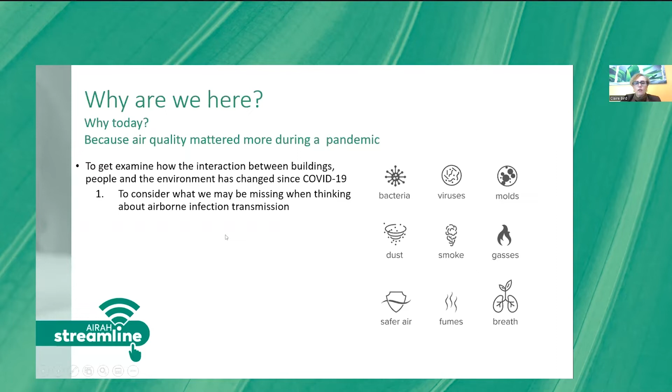So what I hope to get out of today is to examine how the interaction between buildings, people and the environment has changed since COVID. Also, we'll look at considering what may be missing when we're thinking about controlling infection transmission. And I want to consider the impact of air quality and transmission mitigation strategies on the broader environment, and its impact on our energy burden and global warming burden, by putting in place preventative measures for infection control and improving our indoor air quality.

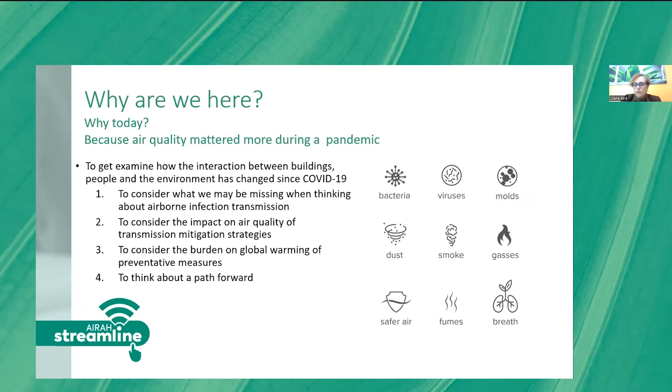But it's really important in any of these sorts of talks that you propose a way forward, and that's something I'll do at the end of the talk.

So certainly public perception has changed. When I think about it as a consultant, I used to get calls from people, and their number one concern would be odour. The second concern would be mould. The third would probably be something that smelt, often a VOC or sewage-related issue, and they'd be worried about having too many children in a classroom and how carbon dioxide might be affecting performance in their workplace or learning centre. The other thing people were concerned about was external pollution, particularly in developing countries where external air quality is very, very poor.

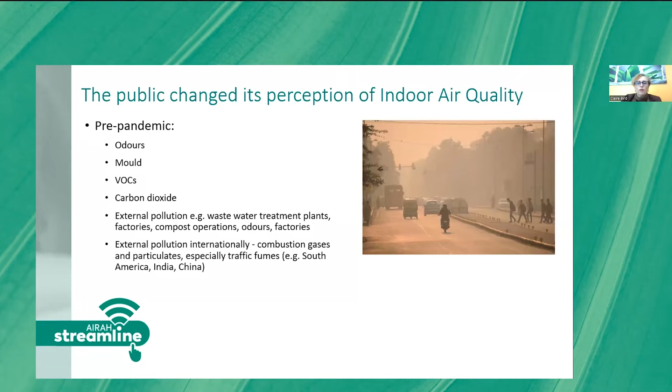We intrinsically bring outdoor air in our indoor environments, we can't survive without it. So even things like wastewater treatment plants and compost operations can lead to odour problems and other microbial concerns. So that's really where we were thinking.

But then came the pandemic, and we had a lot of exposure through both social media and the media generally, and our focus changed to really being pathogen-centric. We started to think about what part carbon dioxide might play in helping us control our air quality. People were still concerned about mould, probably more so than ever, and VOCs, and we've just seen a huge uptick in indoor air quality services demand across the industry.

Scientists are also looking differently at air quality, and we're looking at it these days through a lens of transmission. So pre-pandemic, the biggest concern for scientists were probably volatile and semi-volatile organic compounds in terms of health risks. Certainly carbon dioxide was still an issue in terms of performance and health, ingress of external pollutants, and dampness. Dampness in buildings is what makes people sick, and we'll talk about that a bit later when we touch on mould.

Because that's what I do these days — I run the mould analytical laboratory, and we look after contaminants from buildings primarily that are microbial in nature.

The other thing we were concerned about was emissions from our air conditioning system from mould, but also we were concerned about Legionella and controlling it and monitoring it, and Legionella in dead legs in plumbing systems and faucets. And yes, we were worried about greenhouse gas emissions and climate change, because this affects so many different things.

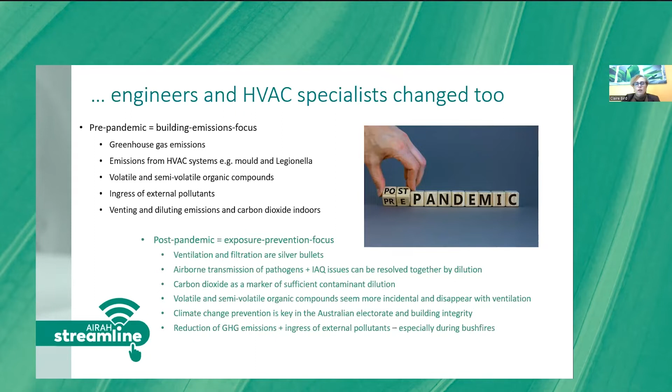I guess the other thing we saw with the election is the public interest in climate change and the importance of controlling it. The other big factor that hit us just prior to the pandemic, of course, was the awful bushfires that we had. So post-pandemic, we've still got a lot of these concerns, but we seem to have shifted to a concern about protecting ourselves rather than preventing emissions, and that will be a focus of today's talk.

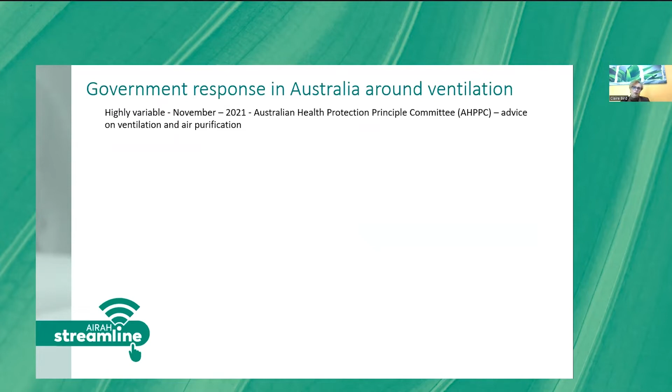So we saw hugely variable responses by the government to accepting airborne transmission and looking at how we improve our ventilation. In November 2021, the AHPPC did produce advice on ventilation and air purification, but that's only a few months ago, and we've been living with this for nearly three years.

If you look at the Safe Work website and look under their COVID section, they tell us it's reviewing it, but at the moment it's still telling us to keep away from people and wash our hands.

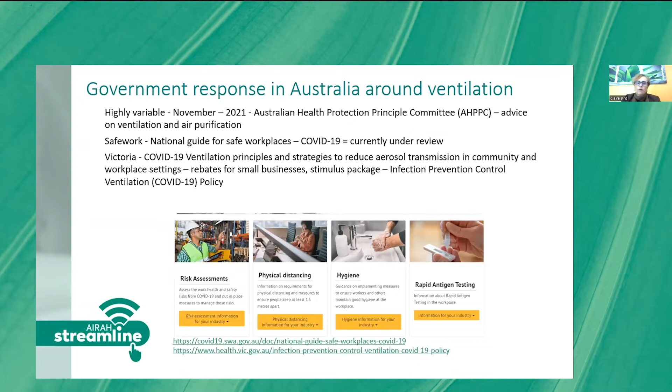Whereas if you look at the Victorian government, which has kind of roared ahead with this, they've got in place their ventilation principles and strategies to reduce airborne transmission. They've got rebates in place for small businesses wanting to increase ventilation, a stimulus package, and they've recently produced their ventilation policy as well.

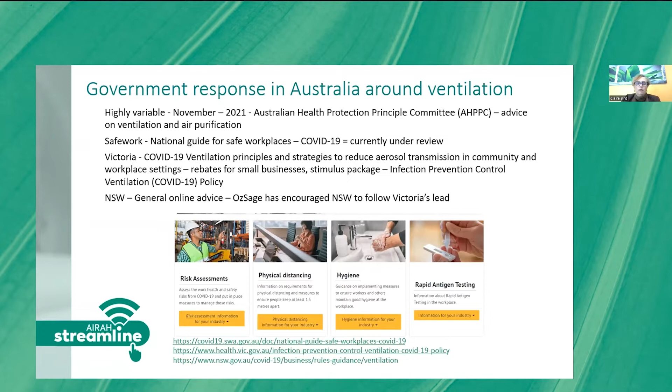Whereas New South Wales are now being encouraged by scientists in Australia to follow Victoria's lead, and they just haven't kept pace. So it's very variable across the country.

Now, foreseeing that this was going to be a problem, there are now groups of experts across the world who have got together and joined forces. In Australia, our leading driver in this area is a group called OzSAGE. This is something that our very own Lidia Morawska and Kate Cole, who's president of AIOH, have been very involved in driving. But there's a huge number of very, very qualified scientists and people involved at different levels with building safety who've got together in Australia to try to drive this change and acceptance of airborne transmission.

I'm part of a group in Canada, the equivalent group called the Canadian Aerosol Transmission Coalition, doing the same thing there. And I'm Executive Secretary of the Integrated Biosciences and Built Environment Consortium, which I'll tell you a bit about in a moment. We've put together a global group to look at how we can get on top of airborne transmission and manage it through these strategies that we're all familiar with at AIRAH.

The AMCA pulled together, Ben Hawkins pulled together a wonderful group of specialists from building performance assessment through to portfolio management and everybody in between to start to look at how we could get this airborne transmission taken seriously. And of course, AIRAH is leading the way in providing some great resources and webinars like today to really highlight that change. So I'm just going to tell you a little bit about IBEC because we are working with AIRAH on part of our programme.

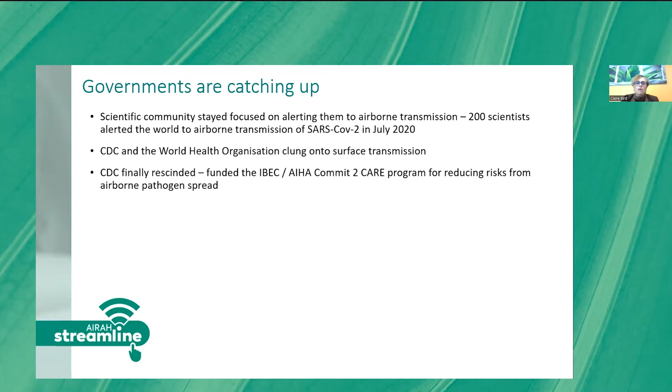So what is indoor air quality and what does it mean outside of disease? Well, any disease or contaminant becomes a pollutant when it's at a high enough concentration to make us sick. So it can be an individual compound, or it could be a physical, microbiological or chemical component, or it could even be a combination of those that leads to adverse health effects.

So just a very quick scout through a list here of some of the gaseous contaminants that we're familiar with in the indoor environment. The semi-volatile compounds, a lot of them come from things like flame retardants - they're very much a work in progress and known to have significant health effects. Particulate pollutants are very wide-ranging in the indoor environment, from asbestos and respirable silica through to incoming diesel particulate from traffic fumes, fungal and bacterial spores and fragments, and of course viruses are particles.

Viruses are quite unique in that they're what I've coined a multi-phase particle. It's a solid particle of virus entrained in a liquid particle of mucus. When you've got these multi-phase particulates, they can behave quite differently to things like an asbestos particle, which is effectively a physical particle. So we'll have a look at how that may impact the control measures we might make in terms of filtration and ventilation in the environment for these types of particles.

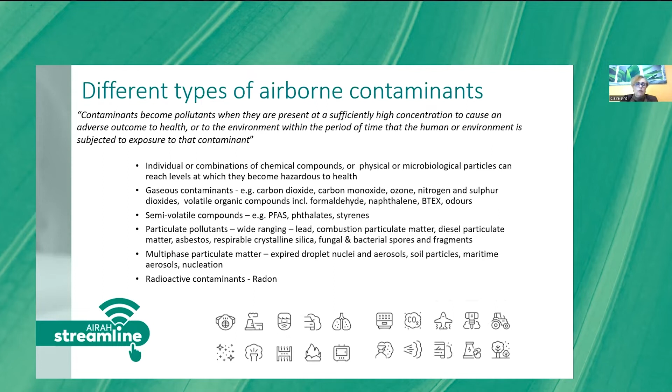The other indoor contaminant which we don't hear as much of in Australia is radon. What we have in the environment at any time is a balance of what's come into the environment from the sources. Here's just a list of some of them, things like gases from paint and adhesives, particles from microbial growth or exhalation of these multi-phase particles, and particles and gases coming from outdoor air through fresh air intakes.

Once those particles get in the environment, they're constantly settling onto surfaces and constantly being resuspended. At any point in time, what we're exposed to in the air is really a balance between what's being released and what's being taken away. Some gases absorb onto surfaces, or react with other gases. Some get taken out of the building with return air and extraction, and other particles are just lost to outdoors through general air exchange through the building envelope.

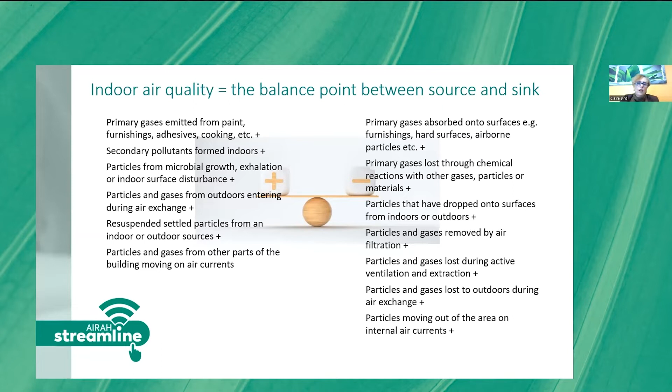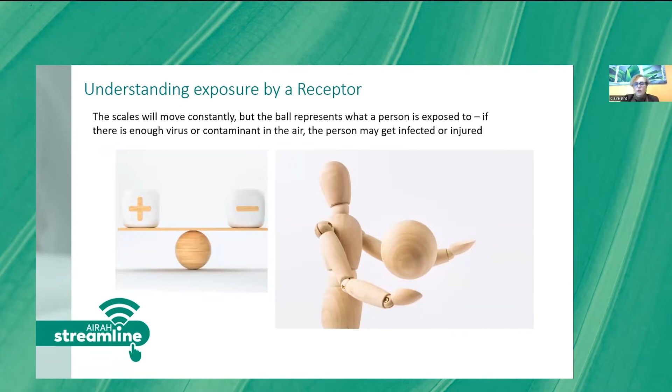At any point in time, what we're exposed to in any space is a balance between what's come in and what's gone out, and that balance point is constantly changing. What we're exposed to is whatever is in there at that point in time. So if we're unlucky and there's enough virus released into the environment that hasn't been diluted or removed, we can catch an infection, or if it's a chemical contaminant, we can get sick.

So how do we prevent transmission? What are the things that we consider? IBEC has actually devised, with AIHA, the 4 Ds: density, distance, duration, and dilution.

There's some things that the person has control over. You can decide how far away you are from someone and how much time you spend in a space. Obviously, the closer you are to somebody and the longer you spend there, the more likely you are to get an infection. You also can play a part in diluting the virus, because if you've got the virus and you wear a mask, you're not going to make the concentration in the air as high. If you're in a room with virus in the air and you wear a P2 respirator, you've got less likelihood of being infected.

It's worth pointing out that there's some reconsideration being made of masks at the moment, because the BA4 and BA5 Omicron variants are highly transmissible. We're now saying that P2 is really potentially the only suitable mask for preventing infection spread, which is a shift from surgical masks with the earlier variants.

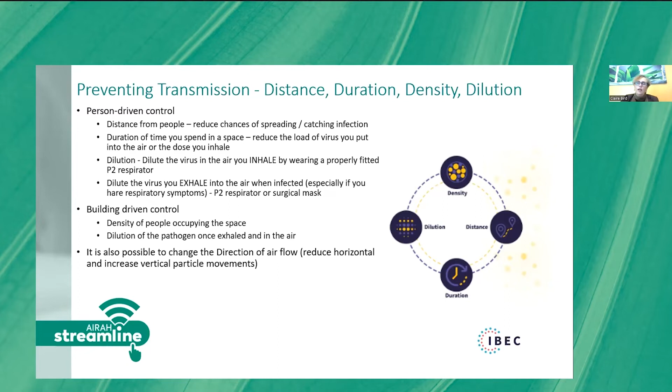In terms of what we can do with our buildings to change infection spread, we can reduce the density of people in the space, and we could dilute the pathogens through ventilation or filtration. Another thing we sometimes need to think about is direction of airflow. For instance, in transport vessels, having lateral airflow allows you to very easily move a viral pathogen from one person to another, where vertical air movements do that a lot less.

I'm just going to ask a question: let's look at this model again, but actually look at it from the perspective of somebody being infected. If we've got a high density of people in a space, like in a classroom, a place of worship, or a transport vessel, we've now got a higher chance that somebody is going to be infected in that space and infect other people. From the distance point of view, the distance that infected person is from everybody else will determine how likely they are to infect someone. From a duration point of view, the longer they're in that space infected, the higher the load's going to be in that space.

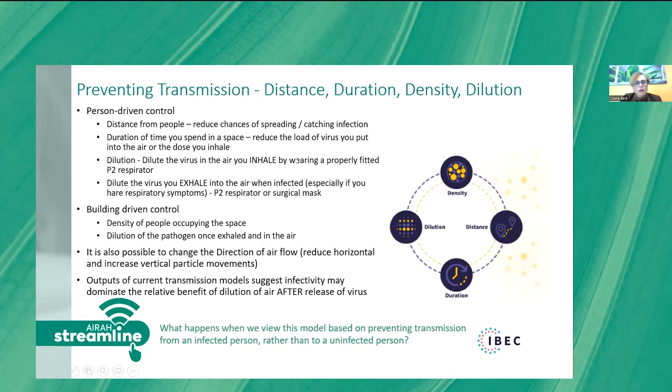And there may not be a lot we can do about those things because we don't know who's infected. But dilution is interesting because the only way we can dilute that source of infection is through stopping it within the breathing zone of that person before it gets into the general environment. So there is a shift here that we're not necessarily thinking about.

As somebody who spent a lot of time working in the external air quality environment, I'm familiar with some of these different ways we look at emissions. We have area sources where there's emissions coming from all different places simultaneously, like bushfires, agricultural, fuel stations, because there's lots of fuel stations around the place. They're all areas.

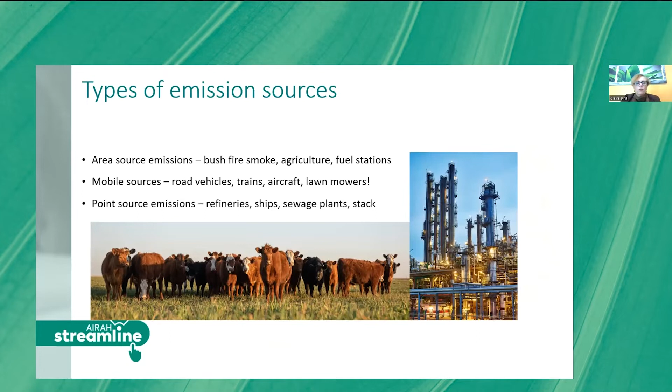Mobile source emissions include trains, aircraft, and even lawnmowers. But we also have point source emissions where we know there's one particular place that's releasing something - it could be a sewage plant or a refinery. An area emission source becomes a point source where it can be traced back to a single point of release or generation of the pollutant.

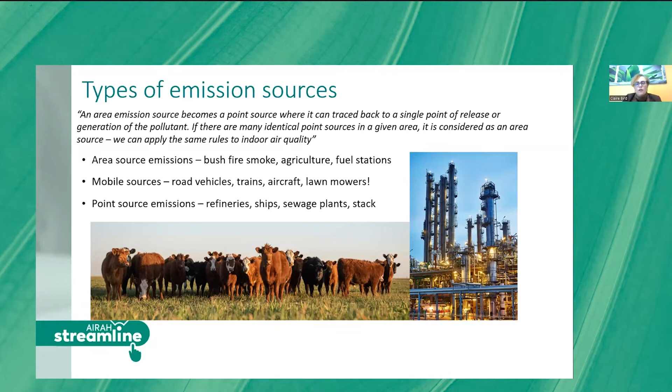If there are many identical point sources in a given area, it then becomes considered an area source. This idea of having a point source where we can identify that contaminant back to one place, versus an area source, actually plays into how useful ventilation is in what we're doing.

We've got some examples of point source emissions. They're obviously an infected person coughing; other biological aerosols in buildings come from toilets, food waste. Even if you've got a lot of plants and soil around the place, they can create a localised source of particles. In terms of construction activities, things like release of asbestos, respirable silica, and lead-based paint normally happen around where the work's actually taking place. So they're also a point source.

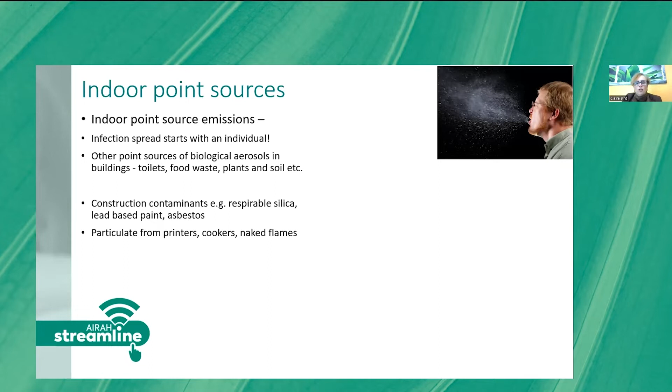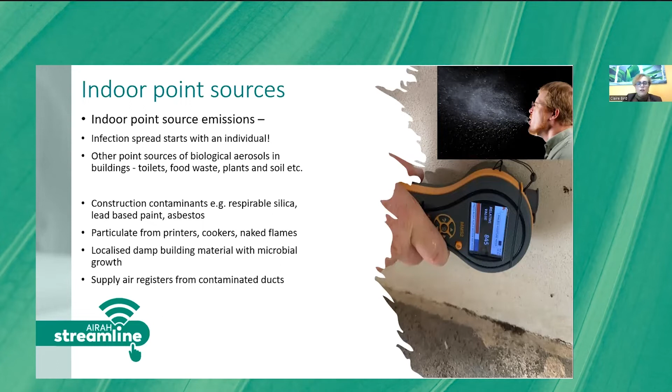Then you've got printers, cookers in kitchens, and naked flames in fires or even gas fires - all of those are point sources of pollution. The other thing is if you've got a very localised damp spot on a building material, that can create growth of mould in a very localised location. Another example is if you've got a contaminated duct just in front of a supply register - that's a local point source of emissions.

Area sources are quite different - things like carpets, timber, and resilient floor coverings, furnishings are spread throughout the building and constantly potentially releasing contaminants, so that's an area source. Contaminants coming in from outdoors through a big open window quickly mix in that environment and become an area source, and that's the same for anything coming in our fresh air intakes.

If you've got a lot of people in a room, they're all exhaling carbon dioxide and water vapour - that's an area source. So we're looking at the moment in monitoring an area source to control a point source. We're monitoring carbon dioxide, which comes from everybody in the room, to control concentrations of something that's coming from perhaps one person in that room.

That's interesting. If you've got damp building materials from condensation, you might have much wider growth of mould over larger areas, or if it's further back in your air conditioning system and being passed through your supply, that obviously creates an area source. If you've got a lot of people infected in a space like a cinema or classroom, then you've got an area source of infection as well.

The other thing we often forget when thinking about things like ventilation is how air movement and dead spots might affect the concentrations in that room. You might have an area source of contaminants, but they might end up accumulating in one place. Or you might have a very localised source that very quickly gets dispersed if you've got very good mixing.

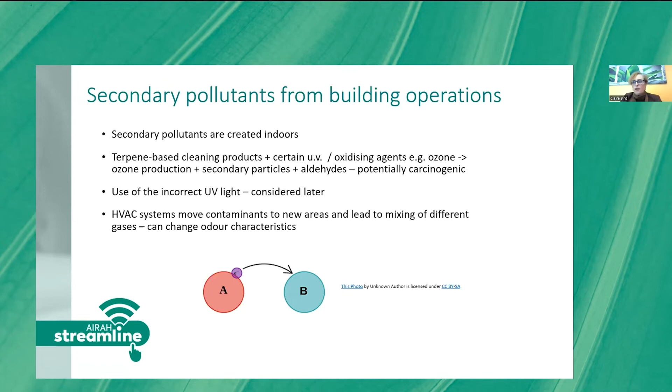So this is where it gets interesting. When we want to manage area emissions indoors, like carbon dioxide or VOCs, ventilation is perfect because we're going to reduce the concentration of those contaminants.

Filtration is great if you want to remove large quantities of particulate matter. So you're going to be dealing with large quantities of air through your filtration, and that may be in your HVAC system, or it may be on a mobile filtration or air purification device. And there's a lot of standalone air purification technologies out there, which we'll have a look at.

But when we deal with point source emissions, normally—I was speaking to Patrick Chambers about this the other day, and he and I hope to present a follow-up session on a topic you guys would find most useful on the back of this discussion later in the year, which Marie can tell you a bit about. When we think about point sources, we don't normally deal with them using ventilation.

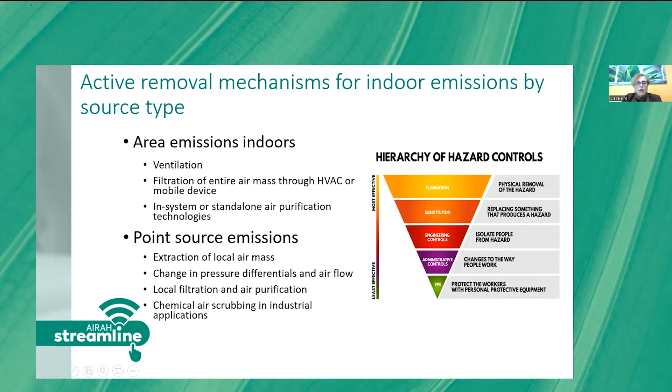We have local filtration and air purification where we have these sources. And again, with industrial applications, you're often even having chemical air scrubbing specifically designed for those local generations. And yet we haven't thought at this point about infection as being a point source of contamination.

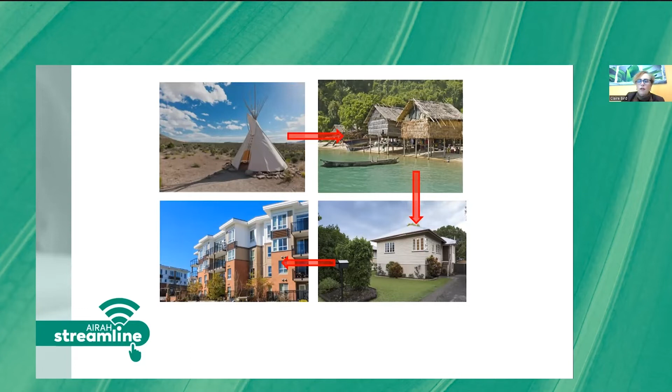And of course, as we've developed our buildings, we've made them increasingly airtight. So the type of ventilation we're looking at may be increasingly mechanical, but we still have an awful lot of buildings in Australia—I think 80% of schools are still naturally ventilated. So we've still got to look at supplemental technologies to actually keep air quality satisfactory in those spaces.

So natural ventilation is difficult to control on its own. It needs assessing—this dilution may not have been enough to reduce transmissibility or bring those airborne contaminants down to a safe level.

The occupant density and the occupant activity in that space may determine how adequate that ventilation is. If you've got people singing or working out in a gymnasium, you've got a much higher rate of expiration of viruses and any respiratory-borne contaminants.

And as I said earlier, one thing we're finding is that when we model air exchange rates, it's not always adequate to control infection spread in densely occupied spaces. So that's where we may need supplemental air purification technologies to mitigate infection risks.

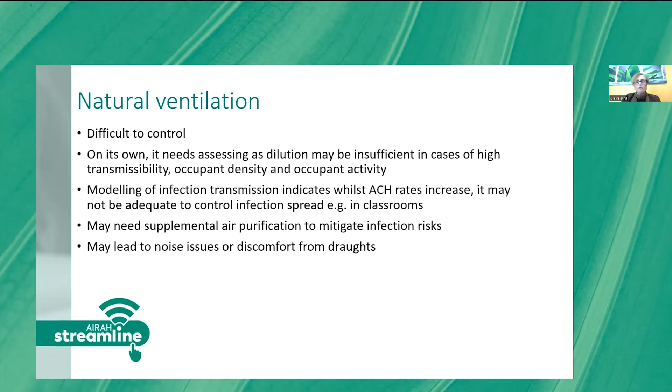The other thing with opening windows is it can lead to noise complaints. It can also mean there's a draft coming in and people become uncomfortable. So that then starts to affect thermal performance of the building.

We need to think as well, when we're increasing fresh air intake, about what we're bringing in from outdoors. We don't want our fresh air intake chugging away if it's going to bring in more contaminants from outdoors than we've got in the environment.

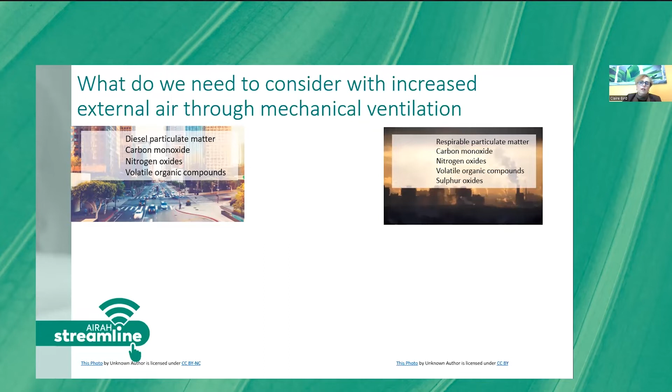So if we're very close to a road and in an urban area, there's part of the contaminants to be concerned about. If we're near an industrial site, then obviously there are other contaminants we need to think about filtering out of the air coming into that building.

Obviously, bushfire is a key one. If we're going to be changing our systems to move towards intake of more external air, how are we going to manage that when we know we've got a very serious health risk coming from outside? We still need flexibility for our systems to handle these sorts of changes, especially in a time of climate change.

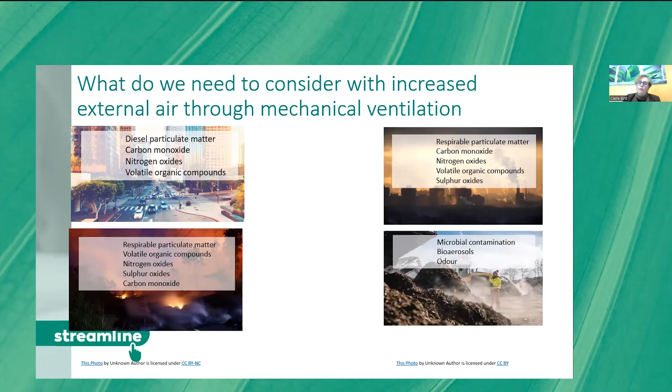And obviously, there are microbial contaminants and odours we want to control from things like wastewater treatment plants and compost works. Odour itself is actually quite an interesting beast. Even though the gases that create an unpleasant smell may not be present at a high enough concentration to make us sick, they can actually make us quite sick due to anxiety.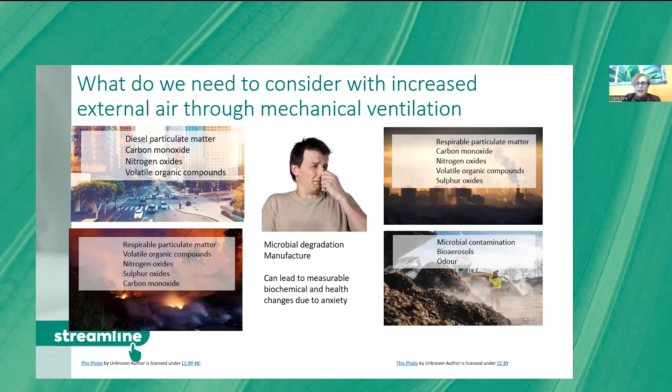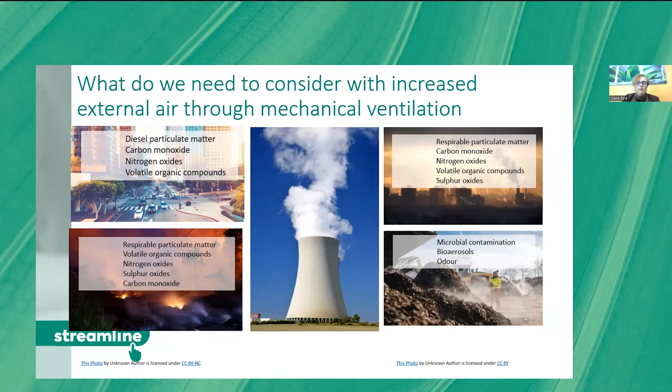Anxiety actually elicits very significant biochemical changes in our bodies that can lead to mental health illness. And it's not in our heads—it is actually a physiological response. The other thing we need to think about is how much humidity and moisture is in that incoming air, because that's going to really impact how efficiently our systems will be able to work, and that's what we'll look at.

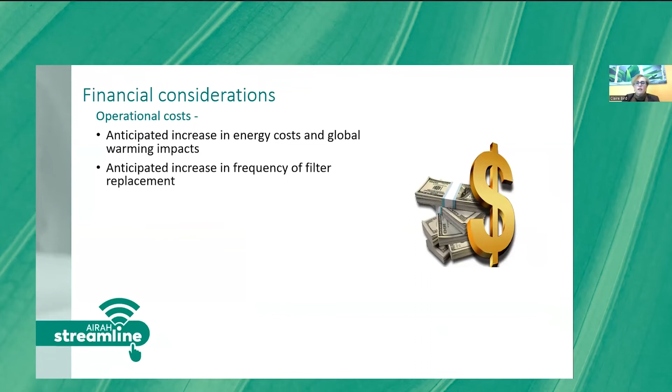Some of the financial considerations in changing the way we handle our air include operational costs. We're expecting an increase in energy use and therefore global warming impact, and there's also an anticipated increase in how often we need to replace filters if we're bringing more external air in.

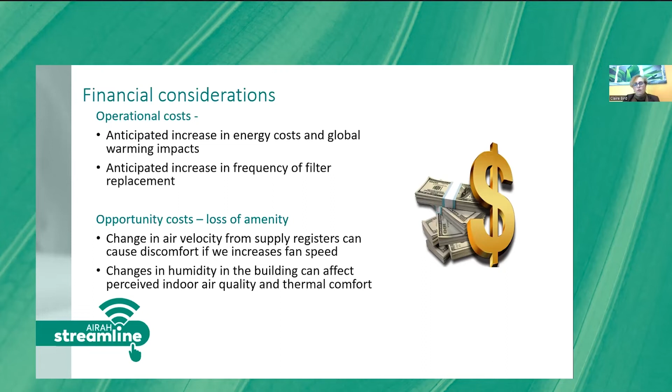There's also an opportunity cost here because amenity suffers if we're not handling our air and managing it so that it's still thermally comfortable. If we're starting to change the velocity of the air coming from the supply air grills, that can also change the perceived value of those asset portfolios.

The other big factor is that humans are deciding to do things differently, and therein lies a problem when we're promoting ventilation without explaining to people what that means and what the risks are, because it can lead to unintentional changes in airflow patterns in buildings if we change air ventilation but haven't actually understood how the air is moving through that building.

Certainly in Amoy Gardens, when we had the very first outbreak of SARS before SARS-CoV-2, we know that emissions from buildings that were venting, particularly from toilets out of apartments, were being picked up on air currents and carried a kilometre away, where they were making people sick in adjacent buildings.

One project I was involved with in Queensland was actually an odour project. We were tracking an odour issue with tobacco smoke. What we found was that if you've got a hallway that's positively pressurised and an apartment with a patio door closed, that apartment is always under negative pressure in relation to the hallway, so air doesn't move from the apartment out into the corridor.

But as soon as somebody opens that door, air is now moving from that apartment more freely into the corridor. And because the corridor is under positive pressure, that's then pushing the odour into the apartment next door. This is potentially why we saw the big problems with spread through multi-storey buildings when we had a lot of people under lockdown.

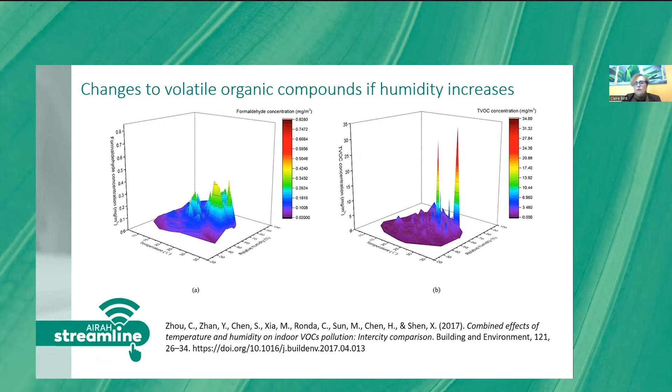It seems that above 50% humidity, you're really starting to see increases in release of formaldehyde in buildings, and again you're seeing increases in levels of volatile organic compounds. So if we change the humidity in our buildings, even within a range that we're normally comfortable with, we could be changing the amount of these contaminants in the air at any point in time.

The number AW is what's called the water activity of the mould. So a mould with a water activity level of 0.8 will grow when the surface reaches 80% humidity. As that humidity goes up, those surfaces become increasingly likely to be more damp or have a tendency towards higher humidity on them.

The more humid that environment becomes, the more likely you are to shift that microbial profile to one that's actually more harmful. And what we have to remember is that the ambient humidity might be, say, 75%, but if the surface is cooler, the humidity on that surface will be higher, and that will encourage mould growth.

When mould changes in the building, it's not the only thing that changes. One of the key misconceptions in indoor air quality is that mould is the only thing that makes people sick in damp buildings—that certainly isn't known to be true.

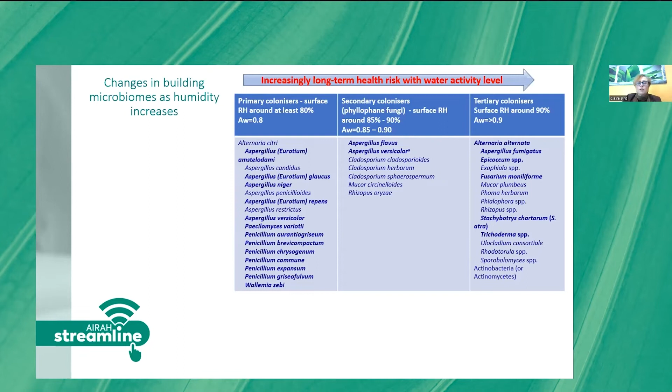In fact, bacteria play a key role. And once the building gets damp, you get increases in dust mites, cockroaches, and even rodents that lead to quite substantial shifts in the health status of that building.

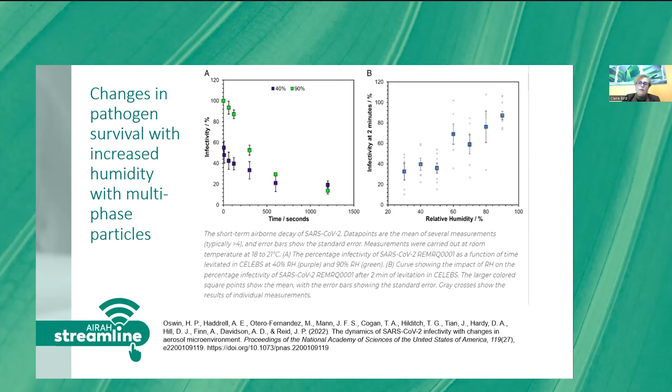In terms of semi-volatile organic compounds, they're phase shifters. They're quite interesting. They're unique in that they move between the solid and gas phase quite frequently. And that change seems to be driven by temperature rather than by humidity, for what we could tell at this stage. So there's still a lot of research going on in this area. But again, we need to keep an eye on any changes we make in that internal environment to make sure our ventilation is adequate to remove any increased risk.

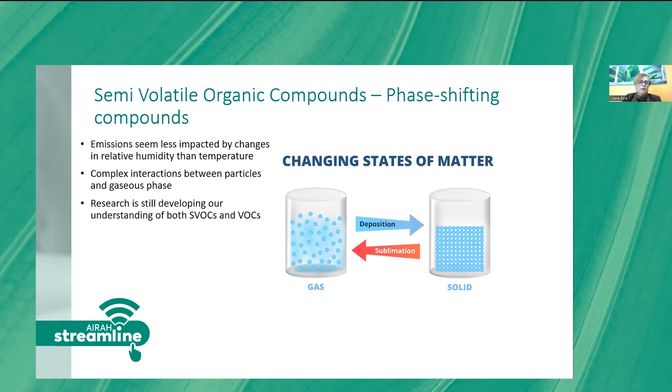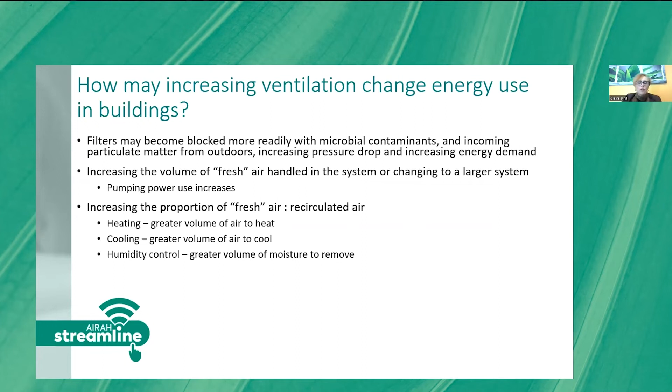Okay, so how does increasing ventilation impact energy use in buildings? Well, filters can become more blocked because you're bringing in more outdoor contaminants and particulates, and you're recycling more air through the system. If you increase the volume of fresh air being handled, then you're going to be increasing your pump use. And if you're increasing the proportion of fresh air compared to recirculated air, you're now having to heat or cool more air or take moisture out of more air. And that's actually going to increase your energy use.

And the interplay between moisture and energy is important, because when we cool air, we remove the moisture, usually by refrigeration. That requires energy. And when external temperatures are warmer than our inside, we have to cool air. When humidity is high, we have to cool air. When larger volumes of air are handled, we're cooling more air. So these are all places where we start to create an energy and a global warming burden on our activities.

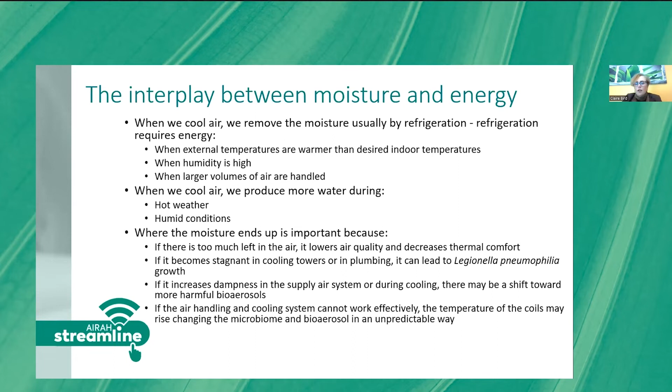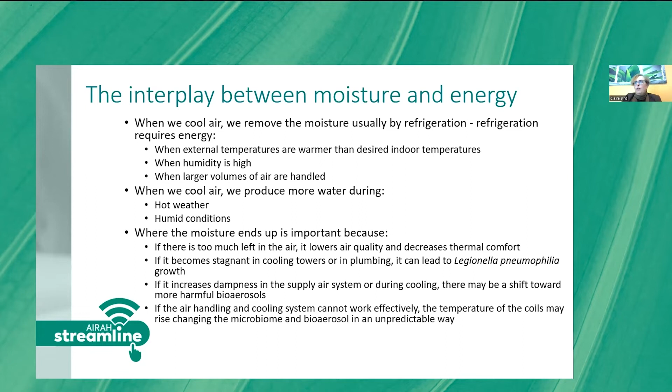And where moisture ends up in the building is important. We've seen the impact that humidity changes can make to air quality and thermal comfort. But also, if we've got a lot more liquid water in the building, say in cooling towers, then that may increase our tendency to release things like Legionella. So it's important that we think about how our systems are working. And if our systems aren't working effectively and we're changing the temperature, for instance, on our cooling coils, that may change the microbiome, that is the types of microorganisms that grow on them, and they may then lead to a different release of airborne microorganisms into the environment.

So when we increase energy, we know that we're having a significant impact on global warming burden because we still use fossil fuels in a majority of cases for our heating and cooling. Fossil fuels remain a key contributor to greenhouse gases. And because we've already got to the level where greenhouse gases are causing harm, any additional greenhouse gas leads to further change. And therefore, all greenhouse gases are pollutants because they're changing the environment.

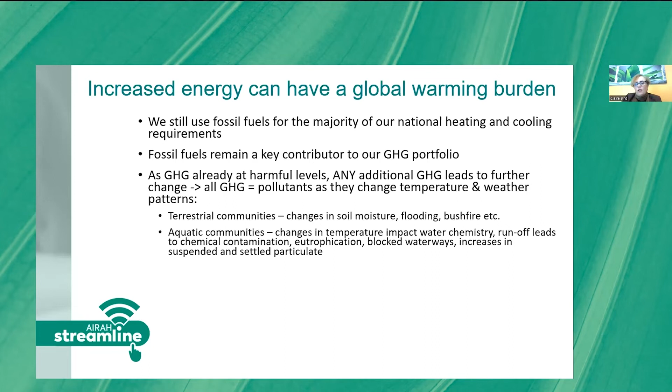They're changing our terrestrial communities, they're leading to flooding, bushfires, changes in soil moisture, which are affecting our agriculture industry. We know that we're seeing changes in aquatic communities, and we're seeing changes in things like migratory patterns in birds and bats and insects. And we've seen what's happened with COVID, but insects carry a significant number of diseases. So the changes in their niches is impacting health as well. We're seeing increased disease spread through flooding in particular, and general environmental changes. And also when we have catastrophic events, that does lead to significant mental health impairments in people that have post-trauma. We see economic impacts, of course, to our farming, travel and energy markets. And obviously we're seeing building and infrastructure damage, which we're very familiar with.

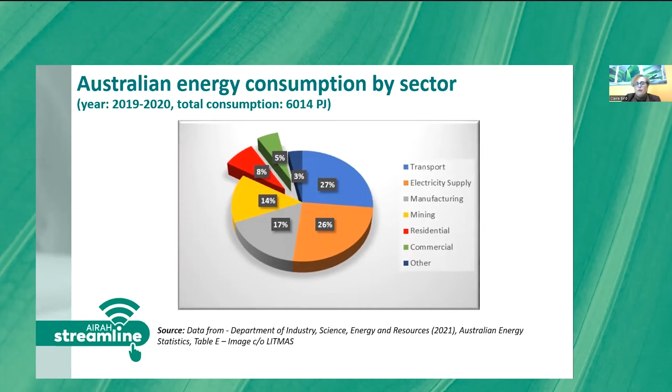So we've got to be very mindful that if we're going to make a decision to increase our energy burden, it's actually going to help us in the long run. Because Australia currently uses about 13% of its energy for residential and commercial buildings, and then 26% is actually getting that electricity to people. So there's actually a big burden in electricity when we use it.

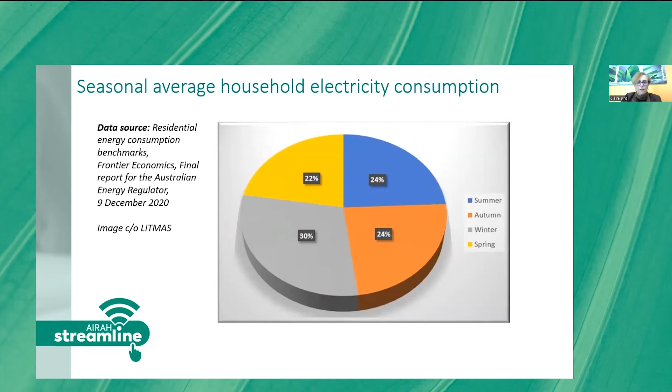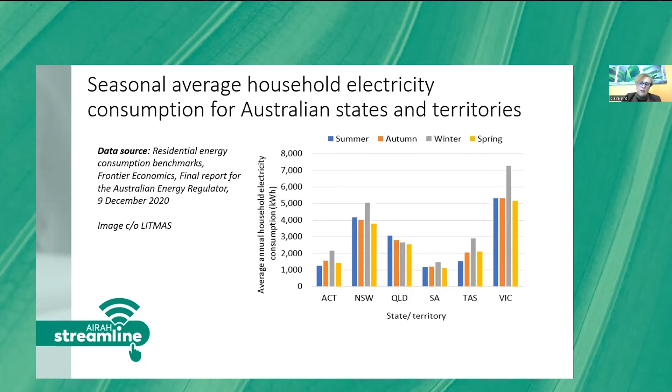So other factors we'd like to look at to finish off on ventilation: what else does ventilation do? We're ventilating the building for pathogens, and we're also diluting other airborne contaminants, diluting indoor odours, and diluting carbon dioxide, which makes the environment a lot more comfortable to live in.

Carbon dioxide emissions do not equate linearly to transmission of virus, partly because we're looking at carbon dioxide coming from an area source versus a point source, but also partly because viruses are particulate.

We said that we're looking at supplementing with high efficiency particulate air filtration, HEPA, which can be integrated into HVAC systems or in standalone units. If we're introducing these, we need to make sure we're not preventing the system from working effectively. We can also supplement with portable HEPA filters.

There's also an opportunity for filtration on people, for instance at their desks or within their breathing zone. And that, I guess, is what we know masks do—they're air filters in your breathing zone.

So what else does HEPA filtration offer us other than infection transmission control? It allows us to extract inhalable and respirable aerosols from outdoors, prevents things coming in from traffic emissions, and allows us to take biological particles out of the air indoors.

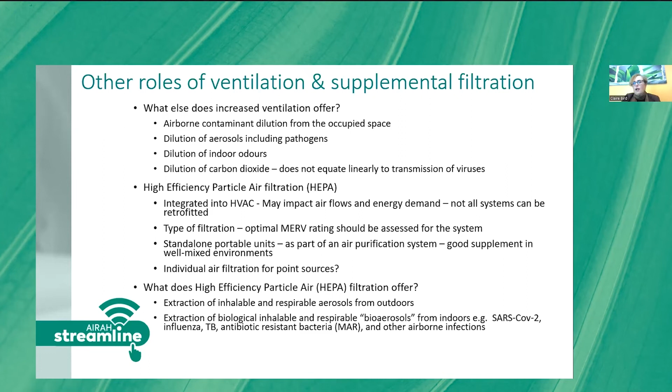One of the big upcoming threats we're going to hear more about in the indoor air quality space is multi-antibiotic resistant bacteria, MAR. Most of the effort in the UK at the moment, in the EPA, is being put into biosurveillance of antibiotic resistance genes in the atmosphere and environment. This is something we're going to be facing—systems that allow us to reduce the risk of antibiotic resistance spread.

There's a lot of talk about ultraviolet, so just a couple of slides on this. The graph shows the wavelength of the different ultraviolet light bands: UVA, UVB and UVC. We know UVC has been very successful in deactivation of pathogens in aerosols.

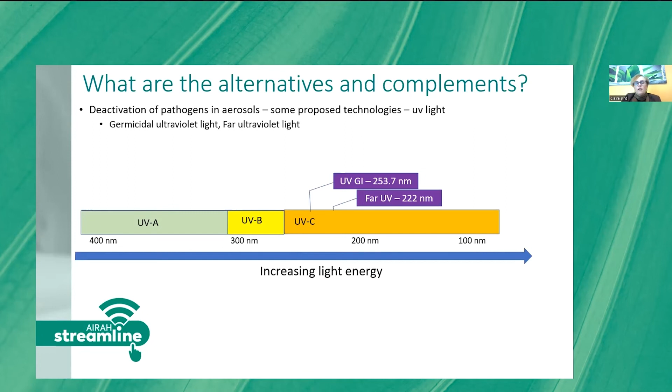Traditionally people are used to thinking about UVGI, germicidal disinfection, which sits at around 254 nanometers. More recently, research has come out on the use of far ultraviolet light, which is slightly higher energy, with a wavelength of 222 nanometers.

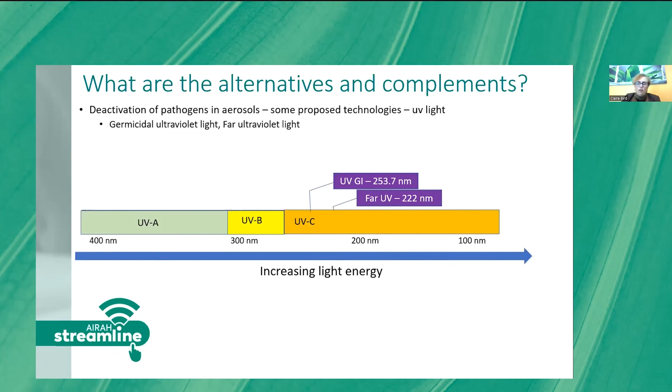The difference is that far UV has been shown to be less damaging to skin and eyes, so you can put it in an occupied space. The downside seems to be that there is some leakage into wavelengths with far UV that may cause some production of ozone in a space.

So a lot of research at the moment is going into making sure that if you use far UV, you're not releasing the very high energy wavelengths that lead to secondary pollutant formation.

Recent studies on far UV show you can kill 99.9% of a model coronavirus in 25 minutes, and in-room UV lamps have been shown to inactivate 98% of viruses in 5 minutes. But the key point is that the organism has to be in contact with that light for the necessary residence time to destroy it, so we've got to think about how quickly air circulates past those lamps.

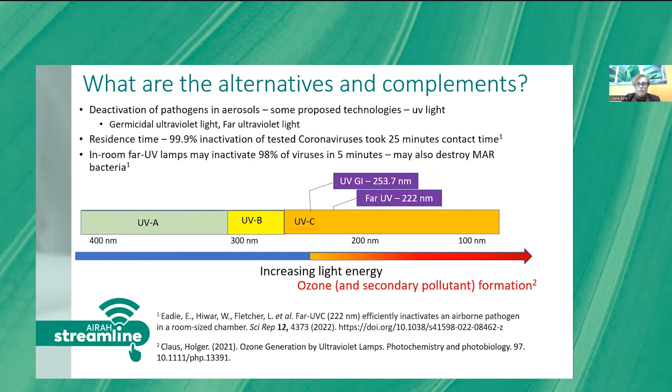So that's just to bring you up to speed with my understanding, which is fairly limited, of where we are with ultraviolet light at the moment for preventing disease spread.

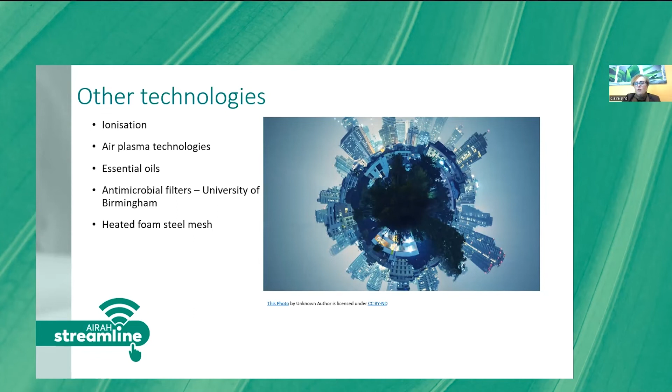There are other technologies being advertised—air plasma technologies, ionisation, even essential oils—some of which have research supporting their use, some of which don't. The University of Birmingham in the UK has just produced a paper on filters where they put antimicrobial products into the filters, and those filters not only remove things like viruses but are actually destroying antibiotic resistance genes as well. There are even products like heated foam steel mesh, purported to destroy viruses.

Given that this has become such a key area of confusion for people, IBEC's actually going to be running a summit on supplemental technologies. We just heard that we've got the funding to do this summit in the coming months, so we'll keep you posted, and I'm sure I'll work with AIRAH to help get that to you.

So what is the future of our fresh air that we're trying to handle in our systems when we think about climate change? Well, increased temperature in the environment evaporates more moisture. Water vapour contributes to 50% of the actual greenhouse effect that allows us to live on Earth and keeps our environment warm enough to survive.

But as temperatures warm, there's less cool air aloft, which means we don't get as much cloud formation, and you get increased airborne moisture in the air. And of course, that then increases global warming. And that then increases the demand on our systems to remove that moisture. And in so doing, we're using more energy. So what we're doing is creating a positive feedback loop.

So we need to work out other ways of being able to dry our air before it enters our building than just relying on something that's very energy intensive.

So just a quick look here now at what technologies are available for monitoring our air quality. There's a plethora of real-time devices, apparently. Real-time devices are very good for looking at changes in air quality trends and patterns of contaminants across the space.

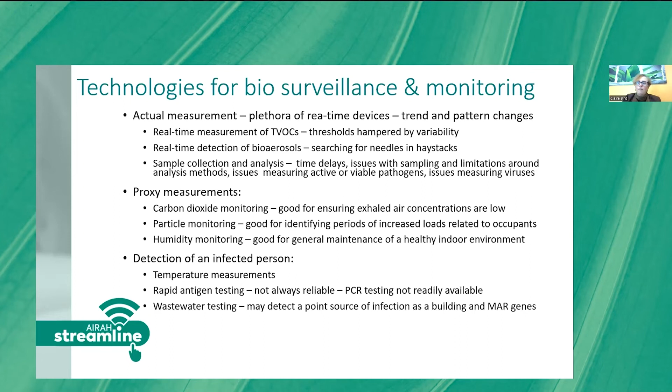And the other thing that there's a lot of work being done on in Australia is wastewater testing for buildings, so that we can identify if a building is acting as a point source of contamination from infections in that building. And we're also wastewater testing to look for antibiotic resistant organisms. So there's some of the methods available to us for monitoring.

The sources and risks for indoor air quality, and poor indoor air quality from airborne infection and from high energy use, we need to educate people. We need a process in place for educating people on what they need to think about to prevent air quality deteriorating and to reduce disease transmission. Disease transmission takes two people. It's not just the person that gets sick, it's the person that got the infection that's going to actually make other people sick.

Learn about the risks and benefits of available technology, because there's a lot out there and we need to know what's right for us. We've got to pick the right trifecta if we're going to win the race, because we need to think about when we use ventilation, where we use filtration, and where we need supplementary devices. We need to understand how airflows might change the movement of contaminants through the building.

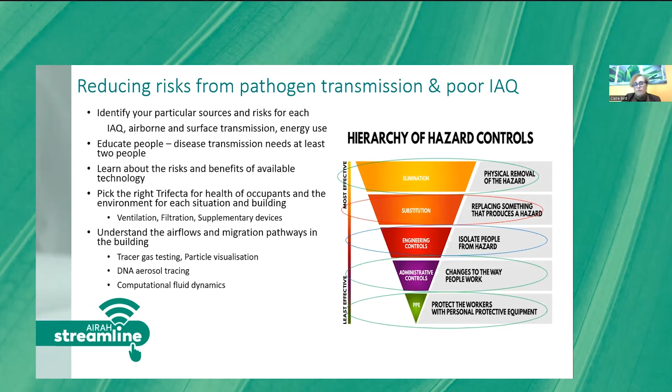And of course, there's computational fluid dynamics. CFD has always had a key part to play, and continues to have a key part to play, if we want to put together a comprehensive management plan for our building air quality.

So when we're doing that, we need to think about people, because if we put the best management plan in place in the world, but unless we can encourage people to follow it, then it's just going to sit on the shelf like so many do.

This was introduced to me by Brett Cole at one of the IBEC webinars last week, where we looked at Maslow's hierarchy of needs. So what is it that people are looking for that they're going to respond to? Well, they obviously need things like food and places to go to the toilet and get a drink, and they need to meet their basic physiological needs.

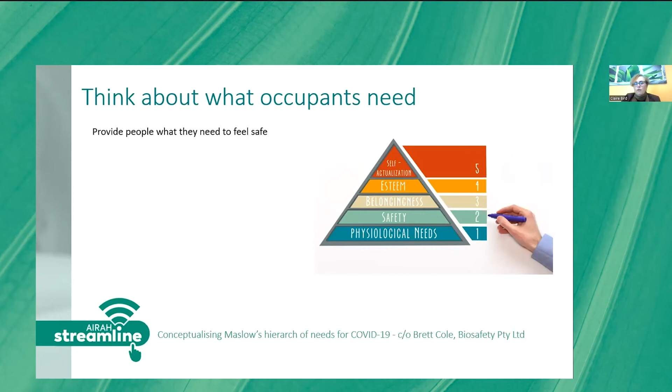But after that, the next thing that people need is things that make them feel safe. They want to feel safe in their environment, so we need to think about what's going to make them safe. Following a risk assessment process, and having people know that you've undertaken a risk assessment, can really help provide confidence in the safety of that building.

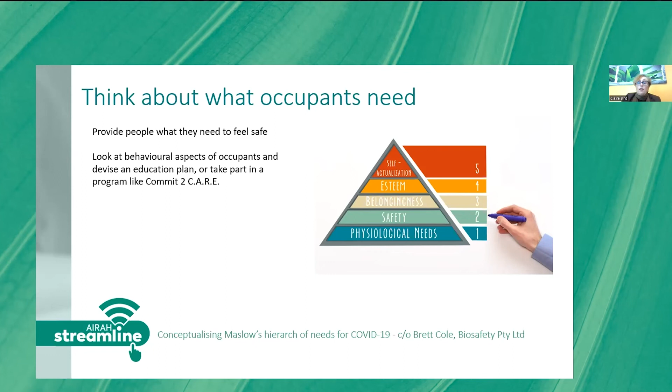So programs like the Commit 2 C.A.R.E. program are fantastic for being able to take a lead in keeping your occupants safe, or even doing it yourself so you can assess your own level of safety in the building where you're working or where you're living.

But it's our responsibility to continue to help people understand that masking still protects others and not just you. And we need to put in place systems to allow for people who protect others by wearing masks when they're not feeling well to be acknowledged as protecting the public.

It's not just a question of COVID. We've had the flu, so many people have been sick with the flu, and we've had the cold. Before we had the pandemic, the biggest concern scientists had was going to be an outbreak of a really serious strain of influenza. So we mustn't forget that this is not only about protecting people from COVID.

We've learned these wonderful tricks that we can put in place. If people aren't feeling well when they go out, just popping on a mask not only protects them from feeling guilty because they've given it to the guy next to them who they didn't know had a granny at home who could get very sick, but it prevents them from spreading it when they're, for instance, travelling on public transport.

So always communicate your actions to your occupants. Any changes that you make to your practices, I'd suggest that are communicated as frequently as possible to the people in your building.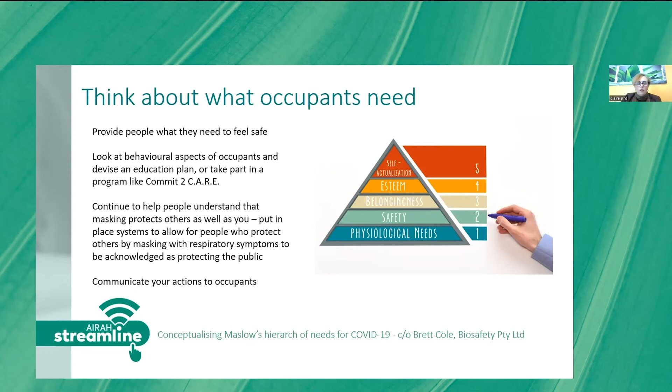And remember, buildings also cause outdoor pollution, so we don't want to be releasing any more greenhouse gases than we have to. They can release manufacturing emissions, laboratories create emissions, and we can release asbestos, lead-based paints, and silica into the environment.

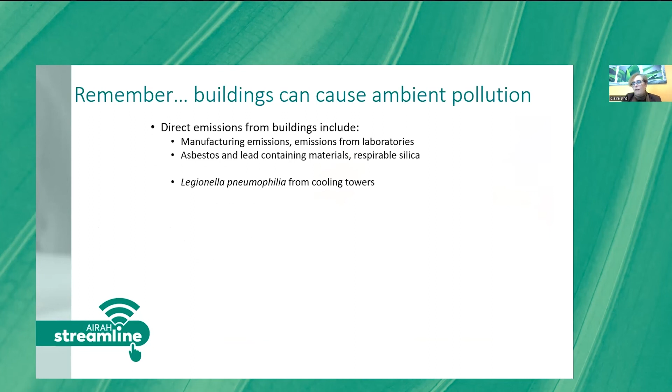We've seen several outbreaks of Legionella from cooling towers because buildings are operating differently under partial occupancy. They can affect an area 6 kilometres beyond your building perimeter. And we saw an example of where not diluting the air in your building when it's got virus in it, and venting it outside, is itself dangerous because you're actually releasing virus into the outdoor environment.

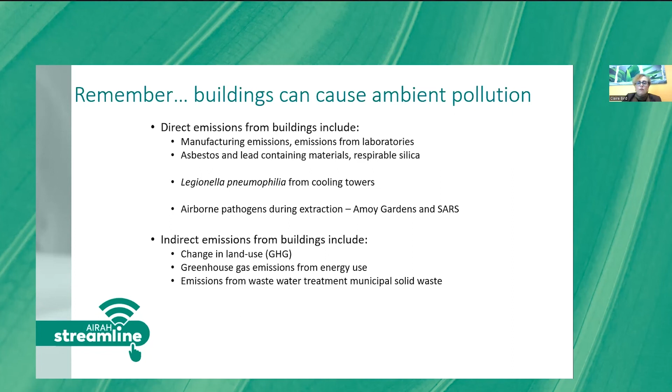Change in land use, greenhouse gas from energy use, and emissions from wastewater treatment and solid waste is also there.

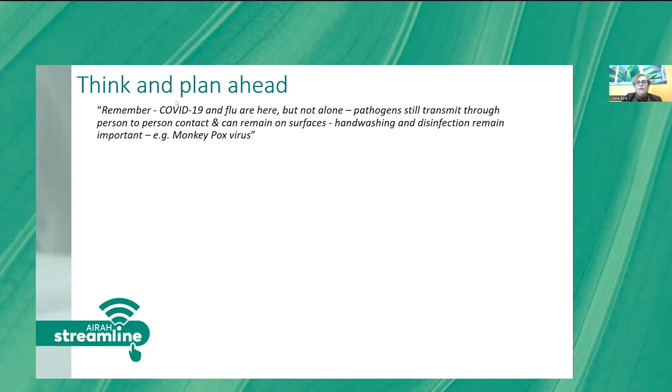I'll just read out the first question we have for you here, Claire. And that one is: part of the way of solving the energy usage of buildings can be helped by reducing the amount of oil heating and cooling by adopting better building standards for insulation, air tightness, and incorporating recovery?

Sorry, could you read the last bit again? The last bit is adopting better building standards for insulation, air tightness, and incorporating recovery.

Absolutely, I think that's going to be critical, and we know this from the results we can see by things like passive house standards. I think it's absolutely critical that we do that, and that's where we need to look and work as an industry.

The next one we have here, Claire, is how important do you believe the vaccinations are in keeping us safe?

Very. They remain keeping us safe from serious illness. One of the most recent research on BA4 and BA5 is suggesting it's very relevant in reducing long-term serious illness and mortality rates, certainly in the older population. The current vaccination is still providing some additional protection, but this is what has just come out of Israel. It's less effective in younger people at reducing serious illness, but nonetheless it's still having an effect.